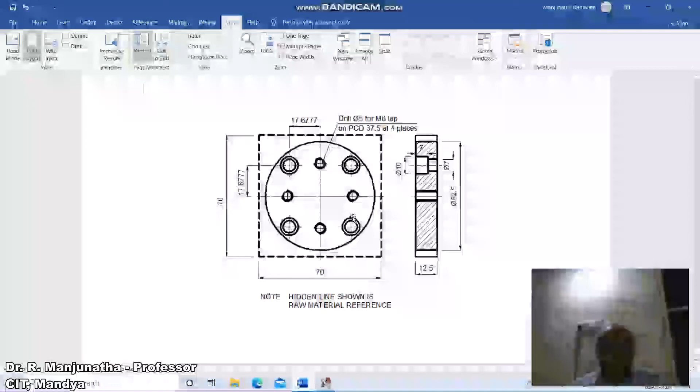So to do this machining, first we will go to the line command and draw a line from the center point, which is 0, 0, 0. We'll draw a horizontal line, and similarly from here you draw a vertical line.

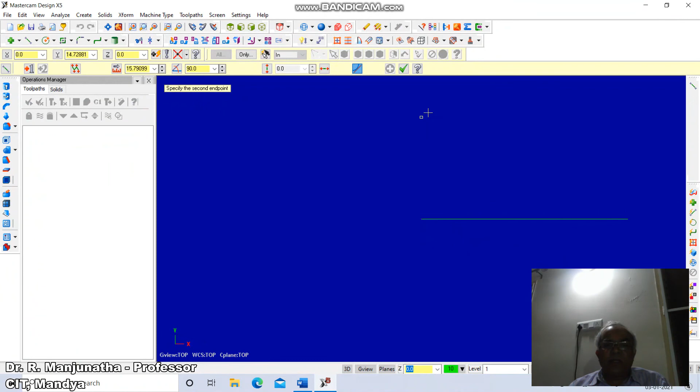Then you have 70 mm, so go to Xform, offset, we will take up 35, offset on this side and also offset on this side, and offset on this side and offset on this side, then fit it.

Then go to extend, extend this line till here, extend this line till here, extend this line till here, extend this line till here. So we have half. Similarly on this side, extend till here, extend till here, extend till here, extend till here.

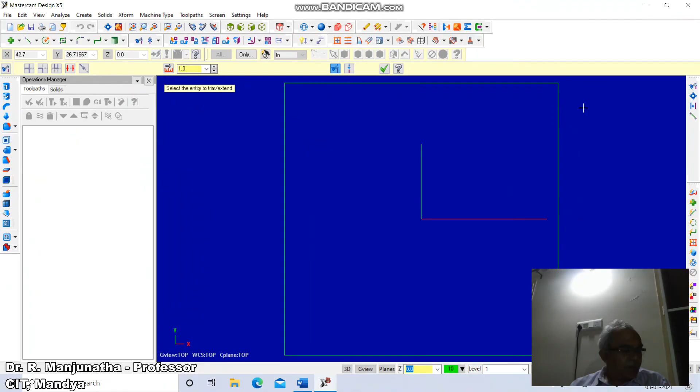So now we have a square. To this square we will have a diameter of 62.5. So we will go for a circle command, take this end point, take the diameter as 62.5.

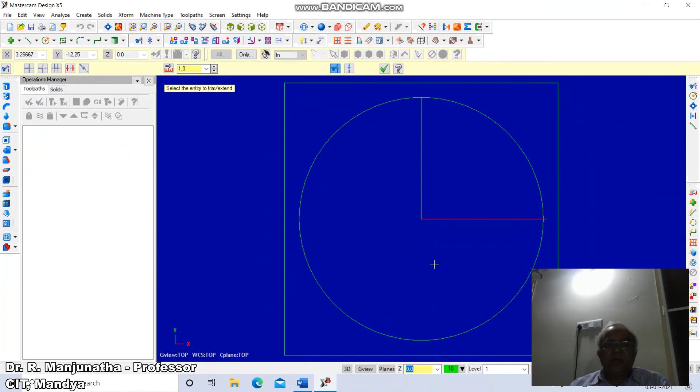Then we extend this line till here, extend this line till here, extend this line till here. So we have the trim option, trim this line, trim this line till here.

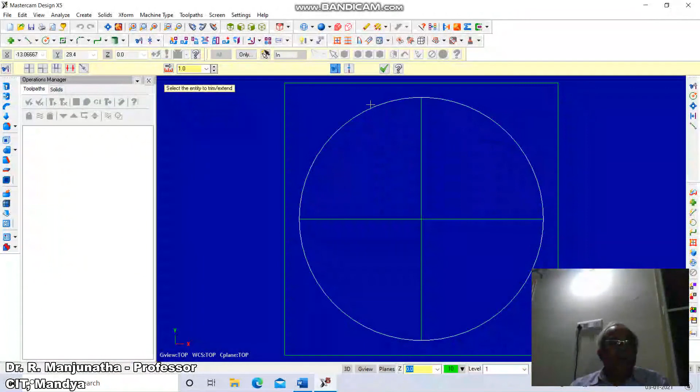So we have this. Now we will go for offset, command is Xform. Now we will take up this loose hole of diameter 7 and then counter bore of diameter 10. So this is at 17.6777.

So to do that, go to Xform, offset, 17.6777, 17.6777. You take this on this side, you take this on this side, you take this on this side, you take this on this side.

Now we will go for a circle command, circle of diameter 7, again on this diameter 7, again on this diameter 7, again on this diameter 7. Similarly diameter 10, so again diameter 7.

Okay, now we will go for circle, go to circle, take the diameter as 10, then again circle, take this diameter as 10, then take this diameter as 10, then again diameter as 10.

So once you do this, now we have all the loose holes. Now we will go ahead and delete all these 4 lines.

Now we will go for the tapping on a diameter of 37.5 at 4 places. So go to circle, take the diameter as 37.5 on this, then we will take the diameter 5 at 4 places.

So go to circle, I will take this diameter as 5, again I will consider diameter as 5, then I will consider this diameter as 5, and again the diameter as 5.

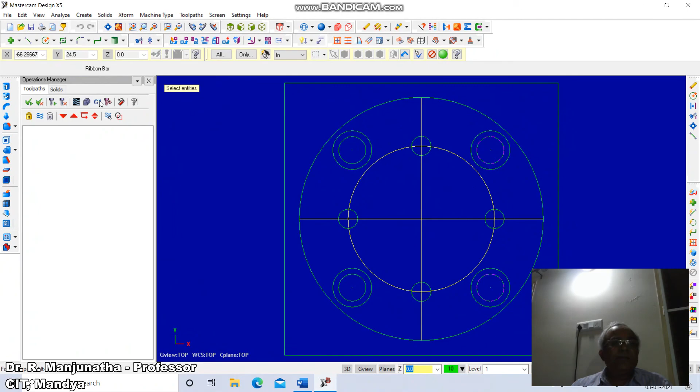Now once we complete this, then we will go for erase these 3, and erase it. Now we have completed the profile creation.

Now we will go for the machining. So to do that, go to machine type, go to mill default. Then click on properties, click on stock setup.

Then click on the select corners. You take this as the first corner and this as the second corner. Enter the Z value as 12.5. Then click on right tick to clear the dialog box.

Then we click on tool paths, then click on 2D high speed. Then click on right tick, click on chain, select on outside contour, click on the top horizontal line entity.

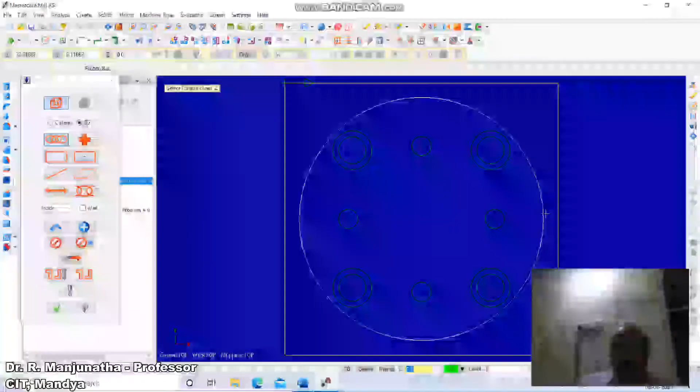Click on 62.5. So both should have the same direction. This is the clockwise direction. Click on right tick.

Then click on dynamic contour, dialog box will appear. Select on dynamic core mill. Click on linking parameters. Enter the depth as -14.

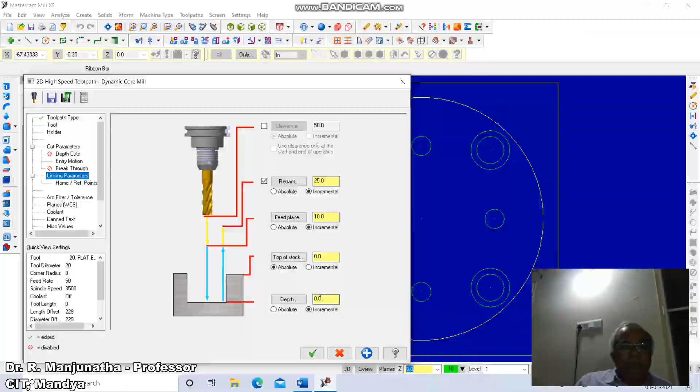Click on tool, click on select library tool, to select 5 mm bull nose mill, that is number 120. Click on right tick to clear the dialog box.

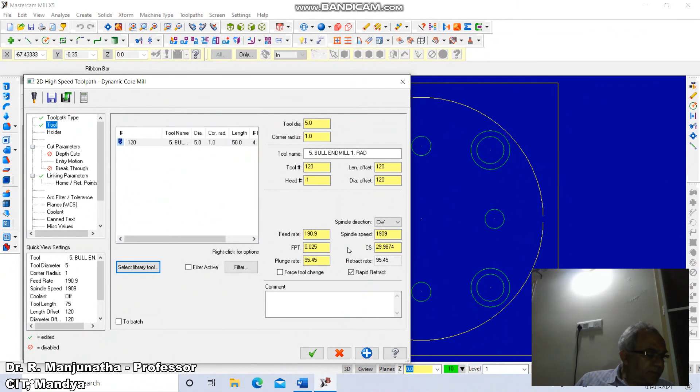So then you will have this. Now the external contour machining is over. Then click on tool paths.

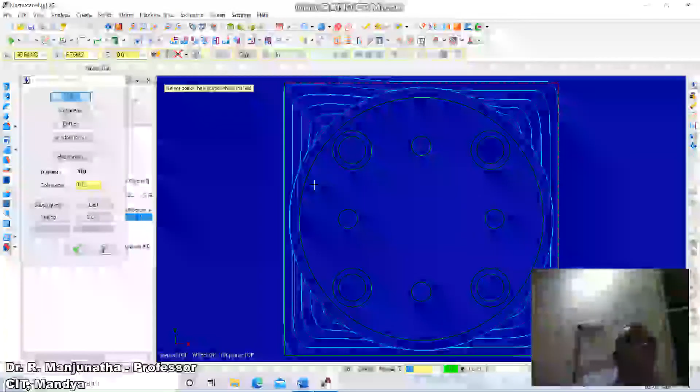Click on drill. Click on select drill positions on the center point of this and this. Accept.

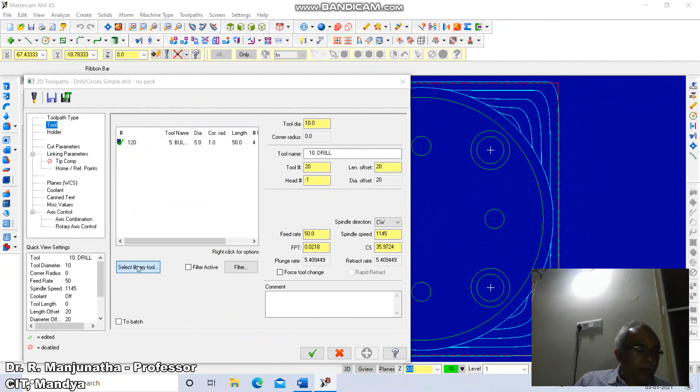Click on 2D toolpaths, the dialog box will appear. Click on drill, click on tool, click on select library tool. Select drill number 80, you just come down to number 80. So here we have number 80.

Click on right tick to clear the dialog box. Click on linking parameters, enter the depth value as -16. Click on right tick to clear the dialog box.

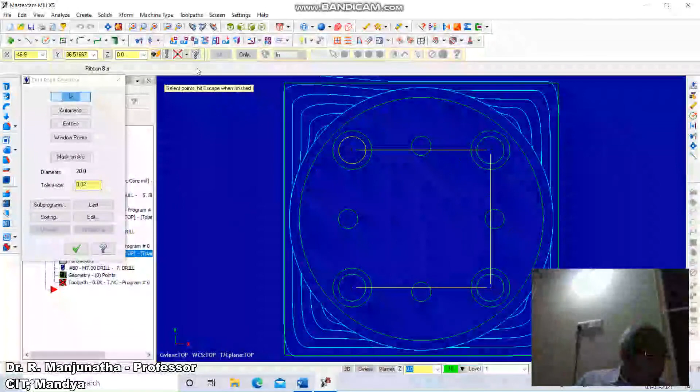So we have all the counter bore. Again click on tool paths, click on drill. Click on select drill positions in the graphics, range of 10 mm diameter: this point, again this point, again this point, and again this point. Click on right tick.

Then click on drill, click on tool, select library tool. Under tool selection dialog box, select 10 mm drill, that is number 110. So we will come down to 110. Click on right tick.

Click on linking parameters. Enter the depth value as -7.

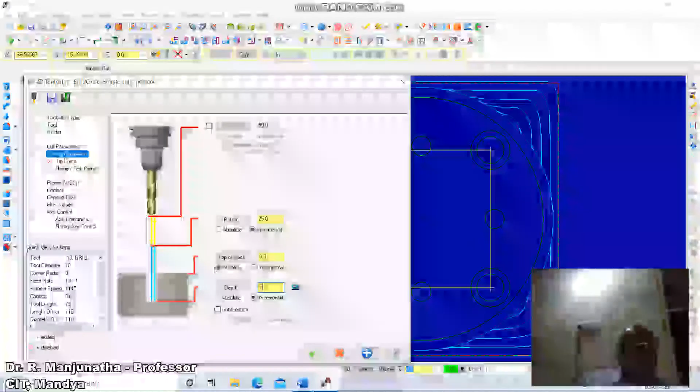Right click on 10 mm drill now. So to do that, I will say right tick and click on right. Okay, so now right click on 10 mm drill. Click on edit tool. Change the tip angle to 180 so that you will get the flat drill. Click on right tick to clear the edit tool dialog box.

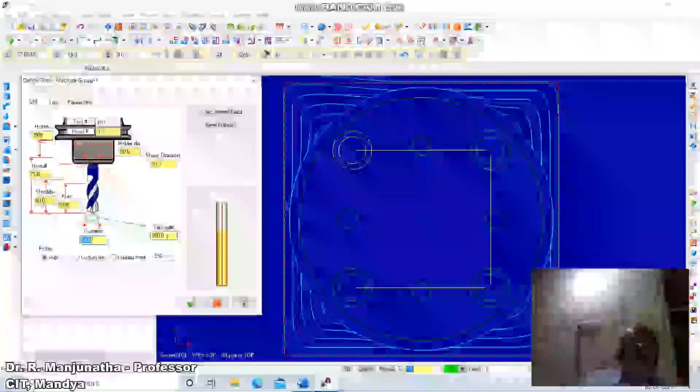So update tool operations that use this tool. The following tool will not be modified, because it has been locked. So you just go to this and right click on edit tool. Right click and make the tip angle 180 and click on OK. Type parameters, click on right tick.

So now it has been modified. Right tick, clear the dialog box. Now once you get this, we will go for the tap of M16.

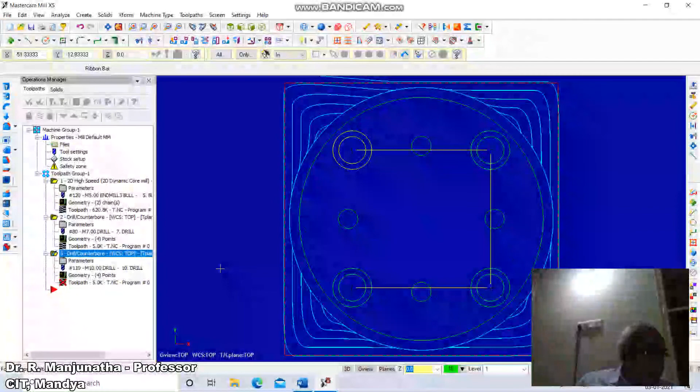So to do that, click on toolpaths, click on drill, then take the drill positions using this screen: on this, on this, on this, and on this. Right click, then click to clear the dialog box.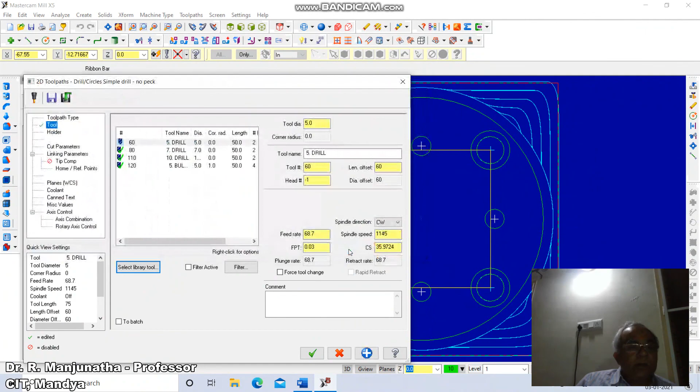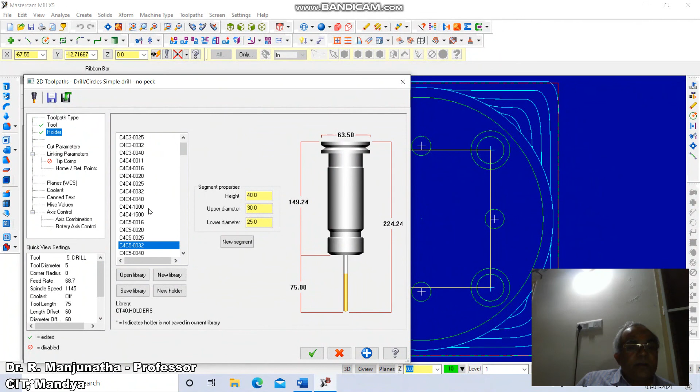Click on holder. Click on holder, click on open library, click on CT40 holders, click on right tick, select C4C5-0032, that is this one.

Click on cut parameters. Under cycle, select on rigid tapping cycle.

Right click on tool number 60 now. So to do that, I will right click tool, then come down, click on right tick, click on edit tool, click on type. So click on tap RH, change the diameter to D is 6.

Click on right tick to clear the define dialog box. Click on linking parameters, enter the depth value as minus 16, and click on right tick to clear the dialog box.

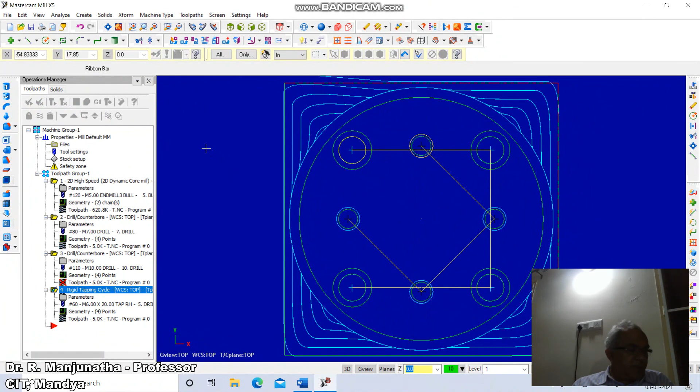So we have the tap. Now we will go for the generation of codes. You just go to this, go to generation of codes.

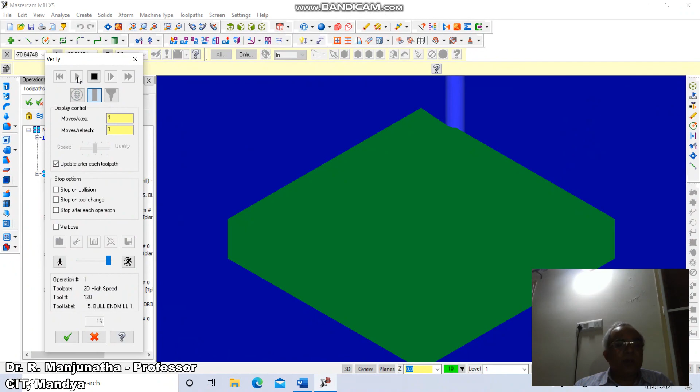And now we go for the simulation. To go for the simulation, click on verify selected operation, go to isometric world WCS, and click on the simulation. The machining will take place with the simulation.

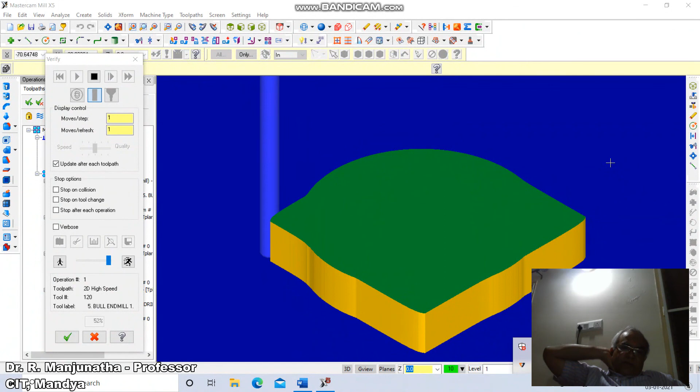So now we are doing the outer contour, machining the circular portion. Once you do that circular operation, then we go for this. Now I am controlling the speed. So the tapping has been done, both the drilling and the tapping operation has been completed.